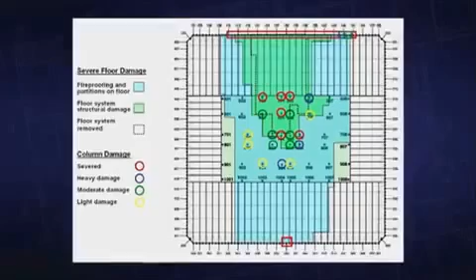September 11th, 2001, a day that changed history. 4 planes went silent and off course. 2 of those planes crashed into the World Trade Center Twin Towers. Several columns were severed, and the jet fuel ignited fires that spread over several floors. About an hour later, millions watched in shock as both towers were suddenly and rapidly destroyed, killing almost 3,000 people, for whom truth and justice may have yet to be served.

Hi, I'm Richard Gage, AIA, licensed architect of over 20 years and member of the American Institute of Architects. I'm founder of Architects and Engineers for 9/11 Truth, a non-profit organization of well over 1,000 technical and building professionals. According to official government reports, the fires weakened the structural steel framing of both twin towers, leading to sudden, progressive, and total collapses.

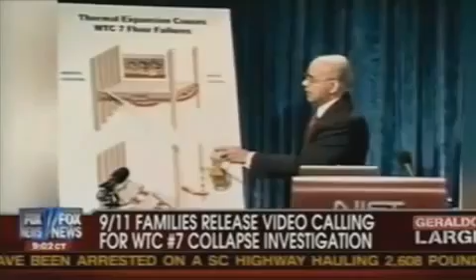Unknown to most people, a third steel frame high-rise, World Trade Center 7, was also destroyed. Critical questions have been raised by more than 1,500 architects and engineers about the official explanations for the destruction of all 3 of these buildings. Along with more than 10,000 other concerned individuals, these professionals, collectively comprising more than 25,000 years of experience, have signed our petition. They're calling for a new investigation into the destruction of these 3 World Trade Center high-rises.

This call is based on evidence that reveals a very different destruction scenario than reported by government engineers. This includes abundant scientific forensic data and eyewitness testimony that was omitted from the official reports. You'll be seeing this evidence and hearing from dozens of these technical experts, including many who are among the top in their respective fields.

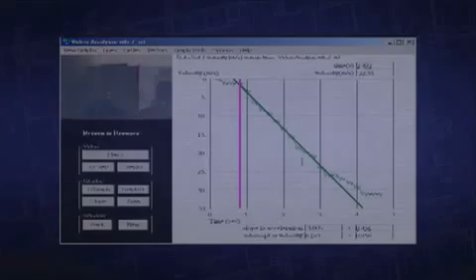Listen to the President provide his account of the pervasive political abuse of science. And we have watched as scientific integrity has been undermined and scientific research politicized in an effort to advance predetermined ideological agendas. As coherent sets of scientific facts are brought into focus by the experts, the data, and the witnesses in this film, you'll come to a much greater understanding of the events of 9/11 and will be in a position to draw your own informed conclusions.

Also, psychologists, therapists, and counselors, along with theologian David Ray Griffin, who have a deep understanding of the personal issues associated with 9/11, will explain why it is so difficult for us to come to terms with the reality of these events, and learn how we can help ourselves and others with this difficult yet vital responsibility.

Of course, the ones still most affected by the events of that tragic day are the family members of the victims lost on 9/11. Several have asked to appear in this documentary. Although our focus will be primarily technical, we are deeply moved and honored to give them the opportunity to speak directly to you.

Now, let's hear from the AE 9/11 Truth professional petition signers, who will share with you what conclusions they came to. Among these experts are high-rise architects and engineers in the fields of structural design, material science, chemistry, fire protection, metallurgy, as well as physicists, explosives experts, and demolition technicians. Joining them will be firefighters and 9/11 victims' family members who support our call for a new World Trade Center investigation.

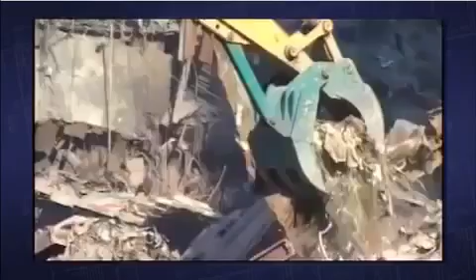Was the structural steel from World Trade Center 7 preserved, documented, analyzed according to standard procedures for investigating engineering failures? It was really clear from the beginning that there was this great move to, as quickly as possible, get rid of all of the rubble and move it off. Because what they did immediately after 9/11 was they started removing the steel, the debris from Tower 7 and all the towers immediately. They sent it off to China to be recycled.

400 truckloads per day of material were taken away from the World Trade Center site and sent to China for recycling. All of a sudden they had a big incentive to recycle steel for some reason. Quickly and rapidly, they were destroying the structural steel. The steel was hauled away and melted down before it could be analyzed.

It was already being carted away and destroyed when the FEMA investigators got there about a month after September 11th. It was being melted down, it was being cut up into pieces so that no real thorough investigation could happen. And that in itself is a crime, and that kind of thing needs to be investigated.

The steel was picked up and carted away before anybody got a good look at it. And the destruction of evidence was a criminal act in itself. It would have answered a lot of questions that we can't answer because we don't have the structural steel to examine.

There were laws violated in the destruction of that evidence. And for the American Society of Civil Engineers to ignore those events is extremely disturbing and is a violation, in my opinion, of their professional code of ethics.

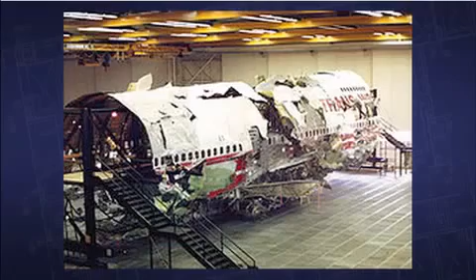Normally, when you have a structural failure, you carefully go through the debris field, looking at each item, photographing every beam as it collapsed and every column where it is in the ground, and you pick them up very carefully and you look at each element. We were unable to do that in the case of Tower 7.

Aside from this one small piece that was found to have intergranular melting, incredibly, none of the other steel from World Trade Center 7 was saved for analysis. This is disconcerting, considering World Trade Center 7 would have been the first steel-framed high-rise building in history to ostensibly collapse due to fire. The government has destroyed much of the evidence, but there's still some evidence available in photographs of the evidence.

My name is Lynn Margulis. I've been doing science every day since I was about 16 years old. I teach at the University of Massachusetts. I have a PhD in genetics. I reconstruct the past, natural history, from clues taken to be representational, and that's exactly what we're doing with reconstructing of why the buildings were destroyed in 9/11. In historical science, that's what must be done.

In 1999, I was a recipient of the National Medal of Science from Clinton, and I received the Da Vinci Award, that is the membership in the Da Vinci Society.

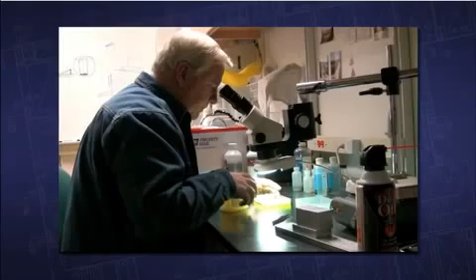Was a proper investigation performed that might have revealed the use of accelerants or explosives in World Trade Center 7's destruction? My name is Steven Jones, a physicist. I received my PhD in physics from Vanderbilt University in 1978, so I've been at this for over 30 years, studying various subjects. I have published over 50 peer-reviewed papers in my career.

NIST concedes that they found no evidence for explosives. So then we asked them, well, did you look? And they said, no, we did not look for explosives or residues of explosives.

I'm Ron Brookman, licensed structural engineer in California, and I received my master's degree in structural engineering from University of California at Davis in 1986. I've been practicing structural engineering ever since then. NIST never did a proper evaluation of the collapse site and the debris.

World Trade Center 7, I would have expected they would have tested for explosives also because of the nature of the collapse and the unprecedented nature of a steel-framed high-rise building collapsing in such a fashion.

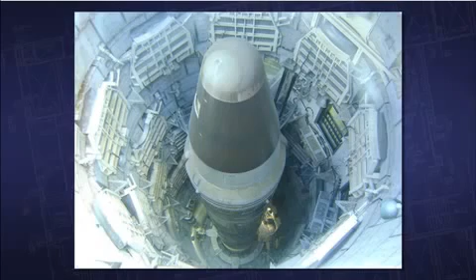My name is Roland Angle. I'm a civil engineer registered in the state of California. I've been practicing in California since 1967. I'm a graduate of the University of California. And my practice has included, among other things, design and testing of structures that were designed to withstand blasts. Specifically, for instance, the launch facilities for the Minuteman missile system.

I was a Green Beret for 6 years during the 60s. I was trained in the use of demolitions, and I blew a lot of things up. One of the things that we did was go out and attack structures, analyze them as to where their weak points were, learn how to place explosives at points that would cause them to fail, and then actually demolish them and analyze our results. So the method of how to attack a structure and cause it to fail with explosives was one of the things that I learned through my military training.

Well, the American Society of Civil Engineers was brought into this investigation early on. They did a very superficial investigation of the site. They issued a report without any significant forensic examination, and there were laws violated in the destruction of that evidence. And for the American Society of Civil Engineers to ignore those events is extremely disturbing, and is a violation, in my opinion, of their professional code of ethics.

I'm Tony Szamboti. I'm a mechanical engineer from the Philadelphia area with over 20 years of experience in the aerospace industry, where I design structures for aircraft and spacecraft and support equipment. Neither NIST or FEMA followed standard protocol for fire and explosion investigations, or just fire investigations for that matter.

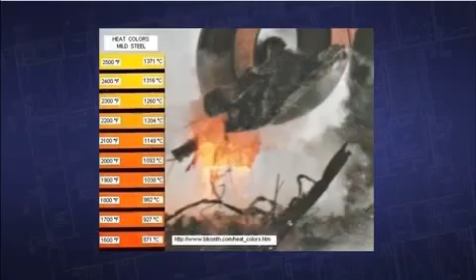Just the fact that there were explosions means they need to be investigated. Terrorists used explosives in '93. We had witnesses to explosions. We have audio recordings of explosions. We have overwhelming evidence that there were some explosive events. The manual gets into thermite, and it says if you have melted steel or concrete, which we had on 9/11, and there's videos of it, people can see it. We should test for it. It says when you have melted steel or concrete, you test for thermite.

So the fact that they're not testing for it is crazy. We had 3,000 Americans murdered, and we had the first three high-rise steel collapses. We have all these reports of explosions. We have the vans pulled over. We have the history of terrorists using explosives. It's absolutely ridiculous that there's no excuse for it. It's criminal, in my opinion. It's absolutely criminal that they refuse to follow the national standards, and the national standards say that they should be testing for explosives.

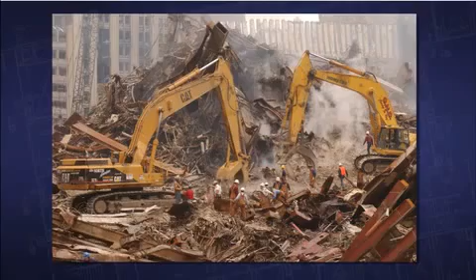One of the other big issues we have, the firefighters that are members of Firefighters for 9/11 Truth, is just the blatant destruction of evidence. We're not talking about a little bit of evidence. They destroyed all the steel, basically the bones of the building that would have told us how this first high-rise steel structure in history that hadn't been struck by an airplane, all it had was a few fires on several floors, and it had only been burning for a few hours. We've had other high-rises burn much longer. This was the way we could have learned from this, was analyzing that, looking at the steel and seeing how this collapsed and how it failed and which steel members did what.

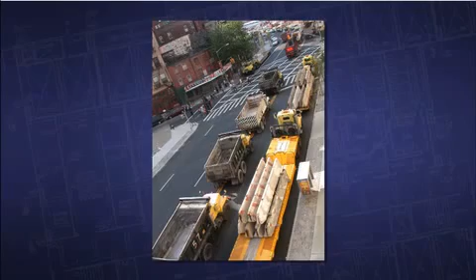Well, we can't do that, because what they did immediately after 9/11 was they started removing the steel, the debris from Tower 7 and all the towers immediately. Why were they destroying this? They sent it off to China to be recycled. So they never had any physical evidence to do the investigation. The national standards are very clear. We have preservation of evidence, we have spoliation of evidence, there's all kinds of basically standards that you don't destroy evidence.

So that's what we're calling for. We're calling for an investigation into the investigators, why they destroyed this. We're calling for a reinvestigation that follows national standards. And the big thing is everybody says this is in the past, leave it in the past, and that's not true. We have ground zero workers dying today. They're getting cancers, and several of them don't have medical insurance. The FDNY, most of them are being taken care of by the department, but there were so many thousands of volunteers and members of other departments that showed up, and they were there for months afterwards, and they don't have the medical coverage. They can't make their house payments.

They're sick and dying, and we as a country are ignoring them. We promised we'd never forget, but it looks to me like most people have forgotten, and they want us to forget, and that's what we're here for, is to basically just ask people to take another look into this, show some compassion, and let's help our brothers and sisters out and really reinvestigate 9/11. It's changed our world. Not to mention that there were 343 brothers murdered, but we're at war over this. We've lost a lot of our freedoms over this, and we don't have the real story on what happened because there wasn't a proper investigation done.

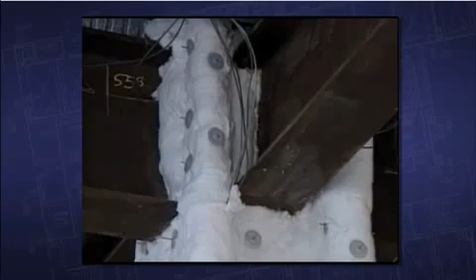The way in which steel-framed buildings behave in fires depends on their construction. In this test, done by British Steel in 1995, a large amount of typical office furniture was burned to see what would happen to the heavy steel beams that supported the ceiling. When steel is bare, when it heats up, it gets weaker. It's not that it melts in a fire. In fact, normal fires are not hot enough to melt steel. Even if you were to use an unusual fuel like kerosene, you cannot achieve temperatures hot enough to melt steel. What happens is it starts to lose its strength, and as it loses its strength, it starts to sag. It becomes softer and sags and can no longer support the load.

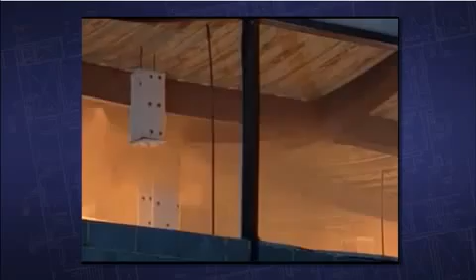This was the largest test of its kind ever conducted. It showed how unprotected steel can be distorted, even by a normal office fire. But as is typical in steel buildings, the structural beams only slowly and progressively warped and sagged. There was no chance of a sudden collapse.

In over 20 years, I have not seen, until recently, a protected steel structure that has collapsed in a fire. The World Trade Center 7 building reminds me of the Meridian Bank building in some ways in Philadelphia. The Meridian Bank building is a 38-story skyscraper that burned for 18 hours in 1991, suffered extensive damage from the fire, but did not collapse.

I am Dan Barnum, FAIA, a graduate architect from Rice University with a Bachelor of Architecture degree. For the 40-plus years that I've been practicing architecture, I have designed a variety of buildings from small houses to high-rise office buildings. Some of the high-rises that I've worked on are One Shell and Two Shell here in Houston, and I was project manager for a 22-story office building in Akron, Ohio. I'm a fellow of the American Institute of Architects. I've designed high-rise buildings, and I know what they do in fires because I've studied that.

Later in the day, when World Trade Center 7 collapsed, they had already shown us pictures of a few fires in that building, and they weren't even raging. How could that cause a building to collapse as if it were imploded? Couldn't happen.

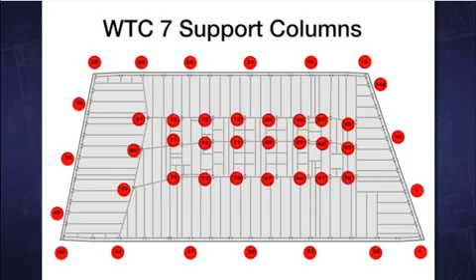My name is Jonathan Smolens, PE. I'm a professional structural engineer in the Boulder, Denver area for the past 12 years, and one of my specialties is forensic engineering, including evaluation of structures post-disaster. What happened to those columns to all collapse at the same time? The explanation provided does not match the evidence that we have.

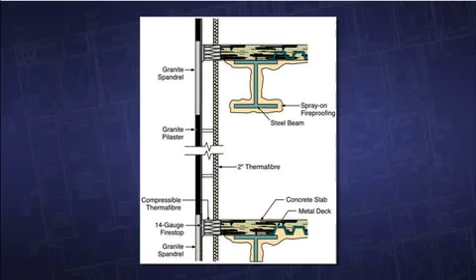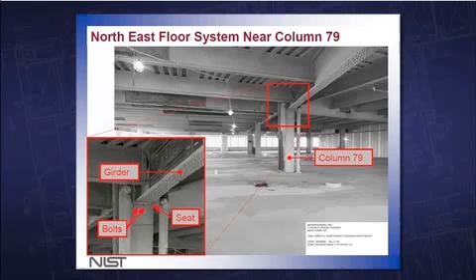My name is Michael Donly, PE. I'm a structural engineer with 14 years of experience. I get involved mostly with the design of steel-framed fireproof buildings. We've never had a steel-framed skyscraper collapse in the United States or internationally, so there's no precedent. I don't think Building 7 could have collapsed by fire, as NIST tells us, with this collapse mechanism starting with thermal expansion that worked its way upward and outward through the building in a matter of seconds. There's not enough time for the building to collapse the way that NIST tells us it collapsed.

I'm Ed Munyak, licensed fire protection engineer for at least 25 years, and I work for a number of organizations, city, federal, large insurance companies, as a consultant, always in the area of fire safety, and with the goal of keeping the public safe and first responders safe.

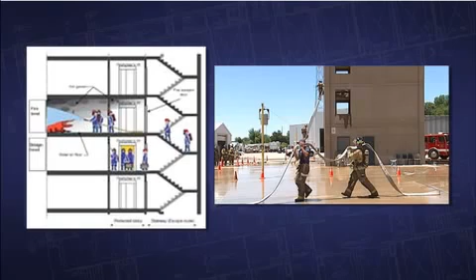I became fascinated with the government's version of the events on 9/11, because this was totally contrary to everything that I've ever experienced, either working in the field of fire safety or knowing what I know about mechanical engineering. It defies many fundamentals of mechanics and materials and physics, and just many fundamental engineering concepts.

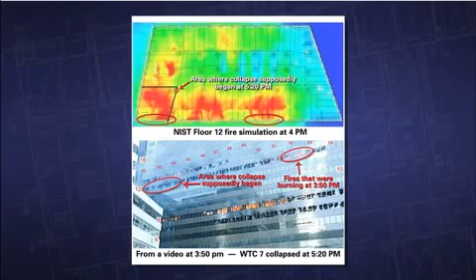World Trade Center 7 - NIST claims the fires were very large, very hot, and long-lasting, when in reality, observation, which has been researched by many people, shows these fires did not last very long. They were not in the locations where NIST claims they were at given times.

According to lead investigator Shyam Sunder of the National Institute for Standards and Technology, NIST, World Trade Center 7 collapsed at freefall acceleration for more than 100 feet of its fall. What does the speed of the collapse reveal to us? Essentially, in less than 7 seconds, Tower 7 came down upon itself.

Building 7 - NIST reports admit it fell at the rate of gravity for the first 100 feet. Well, that's impossible unless there's nothing resisting it. It's just like taking your car keys out and just dropping them. That's how fast the building came down, for over 100 feet. And the only way you can get that is when there's zero resistance.

So what we're looking at is a building just coming straight down, falling right through itself with zero resistance. Buildings don't have zero resistance, which is why you feel comfortable walking into a building. A building cannot do free fall with a huge steel structural system in place to support it without it being blown up. That's the only way it could come down at free fall.

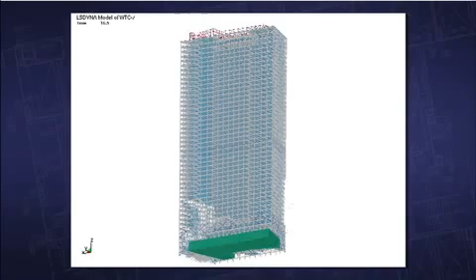The connections failed first without any of the members exhibiting large deformations or deflections. Over 400 connections per second had to fail in order for the members to be released and for the structure to descend at almost free fall rate, failing at that rate progressively across the building. Even if a floor were to collapse, it still wouldn't be able to collapse all of the connections simultaneously at the rate that it did without secondary explosions. There's no hesitation - there was no hesitation when it was to hit story after story.

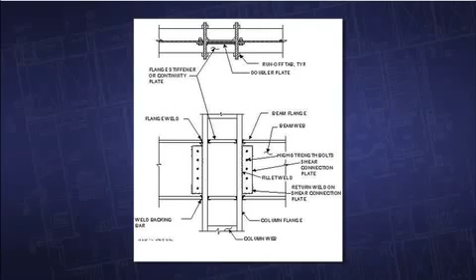If you were to look at a standard moment frame steel connection, which is a welded connection between the beam and the column, it would take on the order of around 500,000 pounds to shear off one connection. If you multiply that by 400, put maybe a safety factor of 4, you would require 800 million pounds of force per second in order to collapse the building the way it was shown based on the NIST report and what we saw on the video evidence of the building that day.

It's highly unlikely. I don't know how that could ever happen without secondary explosions. It's not logical or reasonable. The fact that it's coming down at free fall says all of the energy is being used to just make it go straight down, which means it's coming down through itself and not breaking up the building as it goes. Something else has to be clearing the way. And that is smoking gun evidence to me. I think that's one of the primary pieces of evidence that these buildings really were demolished. They weren't just accidents that happened.

We might anticipate that an unevenly damaged building would fall over. Yet videos of the collapse of Building 7 show a fairly symmetrical fall. How do we make sense of this? The exterior of the building comes down fully, symmetrically, and at one time. Both sides of the building come down completely. This is fully indicative of full structural support being removed for at least 8 stories.

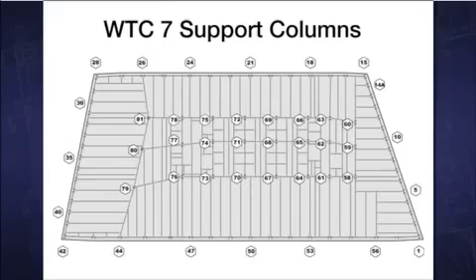For it to come down straight down upon itself, you would need to basically take out the supports at the center, at the core. The exterior columns on the outside as well as on the inside at the bottom would have to be severed almost at the same time. Well, that's another indicator that this report is very suspect, because I would have expected in a classic implosion, as I've seen numerous times, is the core to fail.

My name's Tom Sullivan. I worked for Controlled Demolition Incorporated, CDI, the top-rated explosives demolition firm in the world. As an explosives loader, my job was to place explosives in the buildings to prepare them for demolition. I was licensed while in New York by the New York Fire Department to handle explosives. And I worked on major projects such as Seattle Kingdome, the Three Rivers Stadium, Philadelphia Naval Hospital, and the KeySpan gas holders in New York.

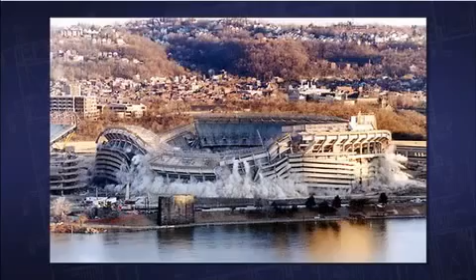I would expect the center of the building to start moving first, and then as the implosion progresses, the sides come in, then the rest of the building is involved. What I saw, it was a classic implosion. The center of the core, the penthouse area, starts to move first, and then the building follows along with it. And there were so many columns in the building that were not affected by either the fires or the impact damage, and they all came down just at once.

So it's a little disheartening, and it's implausible. When it's all finished, the outside walls from the lower floors are piled one on top of the other right in the middle of the building. Just like a house of cards if it were coming down.

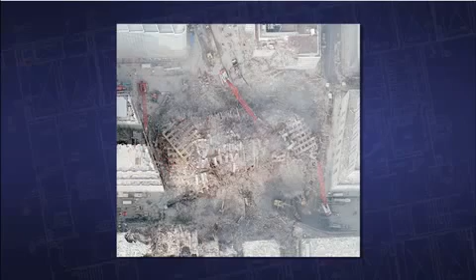Logic tells you that if you have a single failure at some random point in the building, that the entire building is not going to collapse. The collapse would have been a chaotic, random event. The building would have partially collapsed, possibly, but it didn't. There was a total collapse, and there's very few things that could explain that, none of which are addressed by the NIST report.

According to NIST, the failure occurred at column 79 on level 12. This means basically they're talking about a single columnar collapse or failure that resulted in a total collapse of the building. That just does not make any sense. As a structural engineer, I don't believe that the failure of one column would normally bring down an entire building in the way we saw World Trade Center 7 come down, because of redundancy, because of all the other columns in the building that were not affected.

NIST provided computer animations in support of their fire collapse theory. But what do independent engineers say about these animations?

When you observe the footage of how the building failed, and when you look at the animation of the failure, and compare that to what you actually observe in reality, I think they disprove their own theories. It is impossible for it to fail the way they said.

I've seen the animation sequence from the National Institute of Standards and Technology for their mathematical model of the collapse of Building 7. They have the inside members, where one column gave way, which they claim resulted in the collapse of all the surrounding members, and then this precipitated a global collapse.

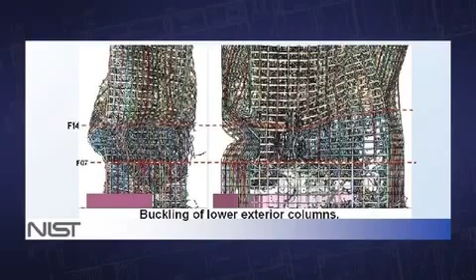The exterior of the NIST World Trade Center 7 computer simulation model, which they put together to try to explain their theory, shows very large deformations which are not observed in the video of the actual event. Yet they don't attempt to explain this in the report, or why their model doesn't represent or replicate reality.

What's actually happening with the NIST computer model is that it's behaving like a natural collapse would. It would be deforming the exterior of the building if the whole interior was collapsing prior to the exterior. What we're seeing is what would happen in a natural collapse, and what we see on the real video is not a natural collapse. So I think that the NIST model is flawed.

Of course, they won't release all of the parameters they used to model the collapse, and that is a primary problem for them. NIST has also repeatedly refused to release computer input data that was requested through the Freedom of Information Act concerning World Trade Center 1, 2, and 7.

What do these professionals conclude about the destruction of World Trade Center Building 7?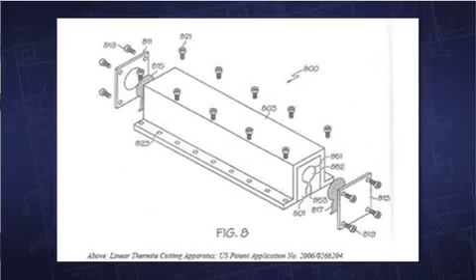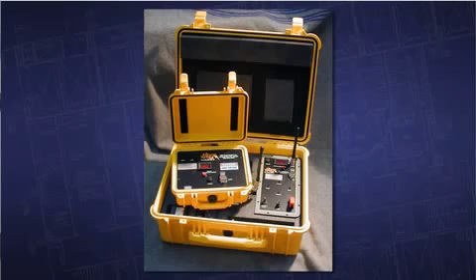There had to be some agent that was destroying the connections in Building 7 at 400 connections per second, and the only thing that I can see that would be capable of doing this would be explosive devices at the connections. This is why I think there has to be a new investigation to find out the real physical causes for all these members to act in an atypical fashion.

I certainly believe that it had to have been controlled demolition, controlled charges, explosives, something of that type, because it was a sudden failure.

Controlled demolition. There's no way that fire did what they said it did to that building. Impossible. Couldn't happen. It just did not make sense that a building that had a few minor fires in it could possibly succumb the way it did.

If there was damage, it would have been minor. There might have been some deflection of a beam or two here or there, but not a total and unequivocal complete collapse. It just doesn't ring true.

A few fires in that building, and they weren't even raging. How could that cause a building to collapse as if it were imploded? Couldn't happen. To me, it was obvious that there was some controlled demolition and some explosions involved.

When I saw Building 7 fall, it appeared to me to be controlled demolition because it fell in free fall manner into itself. It is my opinion, as a former 12 Bravo combat engineer well trained in the use of explosives, that this building, all three buildings, were brought down as a result of controlled demolitions.

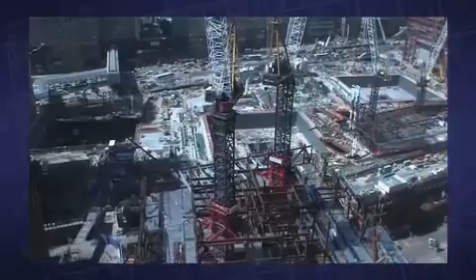This is the original site of the World Trade Center Twin Towers. Construction is now underway where dramatic new facilities are being erected.

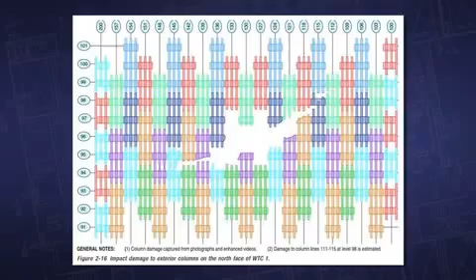Just 10 years ago, the planes hit the towers, cutting through some exterior and interior supporting structural steel columns. The fuel from the planes ignited office fires across several floors. According to the official reports, the structural steel frame was weakened and failed, causing a total progressive collapse of each tower.

Does the official explanation make sense? Was there a comprehensive investigation that examined all of the evidence? Let's look at the details.

These buildings were designed to take multiple impacts from airliners. I walked into the office and the first words that I heard was, 'A plane's just run into the World Trade Center.'

And my initial thought was, well, that's okay. It's built to withstand a 707. He stated that the fuel would be dumped into the building, but the building would still be there, although most of the fuel blew out the opposite side of the building.

These buildings are built to handle several times the load above them. Those perimeter columns could handle 5 times the load above them, and the core columns could handle 3 times the load above them. The majority of the jet fuel was burnt up instantly in the big fireball, and it was gone. The fires that were left were office furnishings and carpet and things like that.

A lot of things in these kind of buildings have to be fire resistant by nature. It's required by code. So there really isn't a whole lot of fuel in there to begin with. The media portrayed these fires as being extremely hot, but the fires were not that hot in World Trade Center 1 and 2. If you look at the NIST's own data, you could see this.

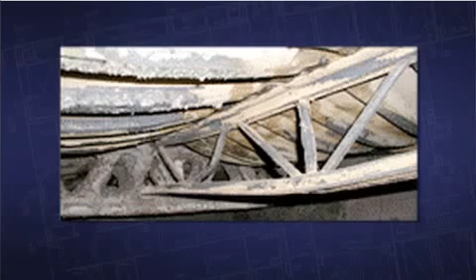The NIST testing of the Twin Tower floor assemblies was done at Underwriters Laboratories. This was done per ASTM E119 in a 2-hour, 2,000-degree fire test. During the test, the main trusses sagged approximately 4 inches after 60 minutes and 6 inches after 100 minutes. Yet NIST had the main trusses sagging well over 40 inches in their models.

Rather than a slow groaning collapse that we might anticipate, the Twin Towers show in the videos a very rapid, sudden onset of destruction. What does this imply?

I'm Frank Cullinan, a practicing civil engineer in the state of California. I have a Bachelor of Science from Chico State, which I received in 1988. I've been a licensed civil engineer since 1993. I specialize in bridge construction, retaining wall construction, small building construction, bridge demolition, and I have experience in bridge design and building design.

Structural steel is required by building and design codes to prevent catastrophic failure and loss of public life. Everybody's seen the building collapses on 9/11, and it was shocking how fast the buildings collapsed. The way the buildings fell was not indicative of the way a building that's in distress collapses. This doesn't happen with structural steel buildings and never has and never will again.

We assume that fires could destroy a building. Why people select steel buildings is because they would destroy slowly. It would gradually twist and bend and give people plenty of time and safety in getting out of the building. The basic philosophy of the building codes in the last 75 to 80 years has been to ensure ductile failure of the members to provide for the public safety.

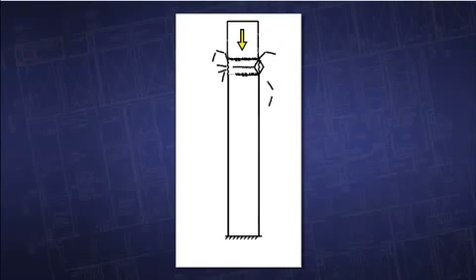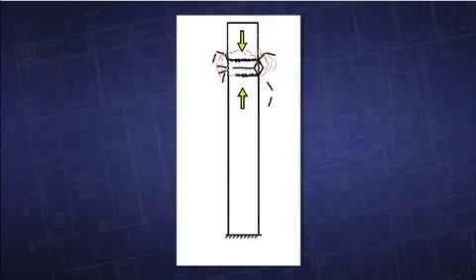You're looking for a jolt, that if this thing actually comes down and hits, you should be able to see the point at which they actually impact, because it would actually slow down the motion of the falling block. And you can see it in the graph. It is not there in the case of the North Tower. It never slows down. It accelerates the entire time. And that was what was extremely significant. So I published a paper about that. It's in the Journal of 9/11 Studies.

And so if you had the top section acting like a pile driver, if in fact it actually hit and made an impact, it was effectively crushing anything, pushing hard on this core structure below it, the core structure is going to push back equally hard. And that's what's going to cause the top section of the building to slow down. But the fact that it's constantly accelerating downward is evidence that it didn't slow down. It's not actually hitting and engaging with the structure below it in any way that could demolish it. The top section is not crushing the bottom section of the building, or it would meet resistance.

I am Richard Humenn. I am a retired professional electrical engineer. I went to Brooklyn Polytechnic Institute and received the Bachelor of Electrical Engineering degree in 1954. I worked for Joseph Loring for 41 years and was Principal Chief Electrical Engineer for the World Trade Center complex.

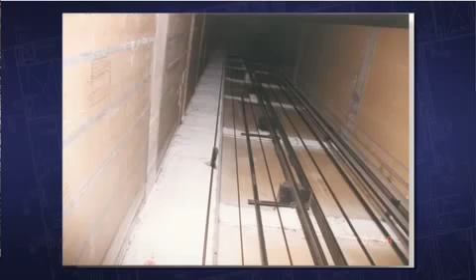I was very familiar with the Twin Towers elevator systems because we took over contractual maintenance and improvements of the elevator systems after the project was completed. I actually ran and rode up and down elevator shafts on the top of a car going 1,200 feet a minute. You could imagine the experience.

I'm very familiar with the interior structure that surrounded the elevator shafts and the accessibility which the elevator companies had 24/7. The only way that I can see that the towers could have collapsed is that the interior columns were compromised.

In Tower 1, unless my eyes were deceiving me, before the tower started collapsing from the top, the antenna started to fall. And the antenna, of course, was over the middle of the elevator shafts. And, of course, their access to the elevator shafts gave them total access to the surrounding core columns, the interior of the core columns.

NIST, the National Institute of Standards and Technology, acknowledges that the towers came down at essentially free-fall acceleration. What are the implications of that admission? The measurements have indicated that Tower 1 collapsed in about 11 seconds and Tower 2 collapsed in about 9 seconds. And the argument goes that this is essentially the rate at which free fall would happen.

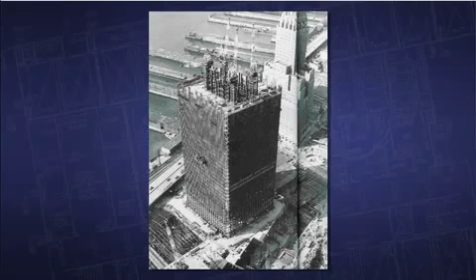I had a friend that asked me if it was possible for the Twin Towers to achieve near free fall speed when they collapsed. The Twin Towers could not have come straight down through the thousands of tons of structural steel, through the greatest resistance, the resistance of 80,000 tons of structural steel, at the speed of practically free fall. That just would not happen.

There are columns of steel around the exterior of the building and within the core, all of which are there to prevent the thing from falling down. And so even if something falls on it, it's not going to immediately just go pop, pop, pop, pop, pop, pop like that, floor by floor. If it's going to collapse, it's going to have to take some time to weaken the structure below it.

This structure was capable of holding 3 to 5 times the weight. And here it is falling through it with a resistance of only 1/3 of its weight. Roughly 90% of the resistance has been removed.

And what's happening is the top section is not crushing down the lower section like a pile driver, which is the picture that NIST basically is painting. It's actually falling into material that's already been pulverized, that's offering very little resistance. It's just coming down through pre-pulverized material.

One of the fundamental laws of nature is the conservation of energy. There was no time for this elastic deformation and plastic deformation, which would have absorbed energy and decreased the descent to less than free fall speed. As energy is drained away from the system to deform those members, it would slow down the descending mass and cause a descent at less than free fall speed.

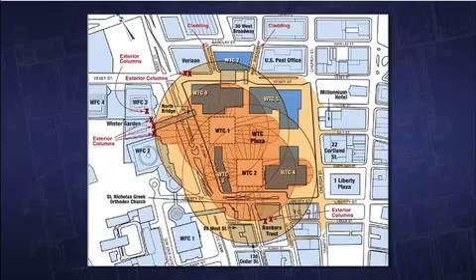The spread of debris in a large radius around each tower—what we see is an outward explosion of material beyond the perimeters of each footprint. And this is not expected, and it's not congruent with the reports of our government.

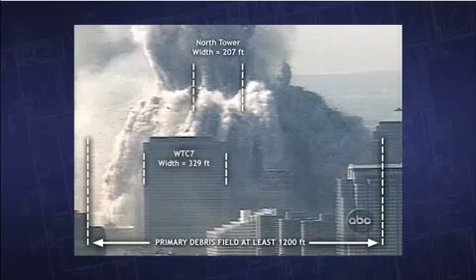Debris was shooting out for hundreds of feet in all directions at 70 miles an hour, leaving the 80th floor of the North Tower and making a fairly level trajectory. That to me is fairly alarming. Large multi-ton beams were hurled hundreds of yards laterally. Gravity works vertically, not laterally. The number I got was 78 miles an hour. So something's happening to throw these things horizontally at those kinds of speeds.

And here it is trailing white smoke the whole time. It really is indicative of some kind of explosion. The individual explosions that I noticed 20 and 30 and 40 stories below the collapsing structure, those are what demolitions guys call squibs. And that's another characteristic that seems to be evident.

Well, in the case of the South Tower, you can see these jets of black smoke being ejected from many locations on many different floors above the level of the impact. There's a whole bunch of these squibs or puffs coming out the side of the building. Naysayers tend to say that's just air being blown out the windows because you have an accordion effect, it's being compressed. Well, it's going on at a lot of different levels at the same time is one thing. And if you're compressing it out here, if you're blowing out the windows down here, how are you getting the air pressure? It doesn't really work to say it's just air pressure.

I estimated these are coming out faster than 100 miles an hour. The impact of the floors pancaking upon themselves would create gushes of air out the side, but not the kind of explosive force that we saw that would throw I-beams across the street into the windows of other buildings. The ejection of materials out of the building, the manner in which it fell, the speed at which it fell, exhibited all the signs of demolitions and the completeness of the destruction down to their individual elements.

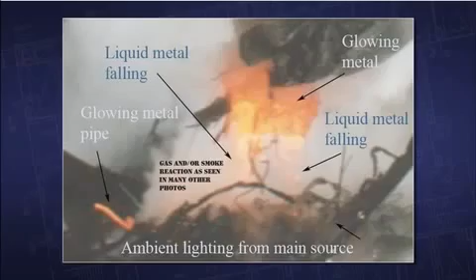In an office fire, you cannot generate enough heat to melt steel. And yet we have evidence of molten iron in the microspheres, in the rubble pile, and the metal pouring out of the side of the tower. We could have filled up the Twin Towers with jet fuel and burned it all up, and that does not cause a fire hot enough to melt structural steel.

My name is Gary Warner. I'm a mechanical engineer. I hold a professional certification from the Association of British Columbia. I worked in the project engineering department of the casting plant of Alcan, the aluminum company of Canada, one of the largest aluminum smelters on the planet at the time.

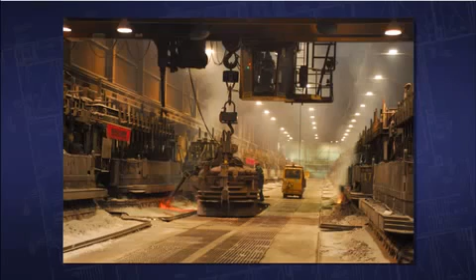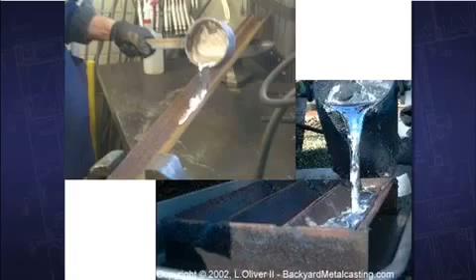And in that smelter, we turned aluminum oxide into aluminum, molten aluminum. Molten aluminum is silver. It's not yellow, it's silver. It looks like mercury. The yellow molten metal that I saw pouring out of the South Tower is indicative of molten iron.

I was a bit incredulous when I learned that NIST claimed that the molten metal was aluminum. It doesn't look at all like molten aluminum. It looks like iron, molten iron. That's what it looks like.

And I've seen tons of it. We used to cast this at Alcan. They still cast it. I spent 2 years casting that.

I'm David Gregg. I have a master's and PhD in chemical engineering from the University of Illinois. Afterwards, I went to work for Lawrence Livermore Laboratory, where I worked for more than 30 years.

You cannot get a flame hot enough to start the metal to molten, make it molten in the first place, so that this other process takes off. I don't know of any mechanism for that.

The only way that's known that a carbonaceous material can cause steel or iron oxide to turn into a molten metal is in a blast furnace. Yeah, and that's very different than what we had.

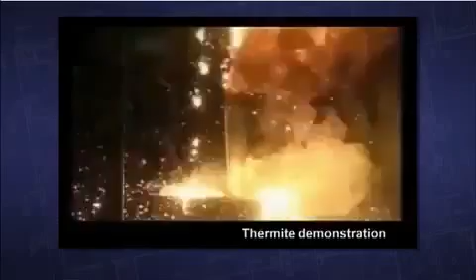An incendiary used by the military, thermite is a compound of iron oxide and aluminum, which when ignited sustains an extreme heat reaction, creating molten iron. In just 2 seconds, thermite can reach temperatures over 4,500 degrees Fahrenheit, quite enough to liquefy steel.

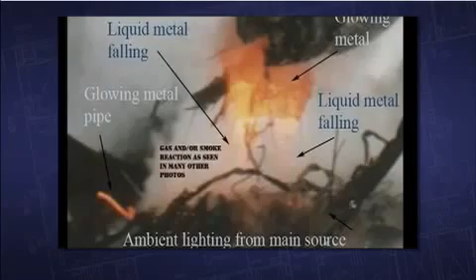We know that open-air fires cannot burn hot enough to melt steel, but metal had melted at the base of the towers. The next question is how do you get the sulfur in these pieces of steel or in the debris, and that question is unanswered.

There's a version of thermite called thermate, which has sulfur in the thermate, and what the sulfur does is it's sort of like salt on ice.

Appendix C of the FEMA report describes sulfur residues on the World Trade Center steel. The New York Times called this the deepest mystery of all. Sulfur significantly lowers the melting point of iron, and iron oxide and iron sulfide.

It basically makes the steel melt at a lower temperature. So instead of having to bring the steel up to 1500 centigrade, you can slice through it with material that's at 900 or 1000 degrees centigrade.

If you do a search on Google for thermite and building demolition, you can find all sorts of wonderful devices that have been fabricated and invented that use thermite for building demolitions. Thermite, the old-fashioned thermite, is a mixture of pulverized aluminum and pulverized rust. If you can get this mixture to react, which is not so easy, it produces tremendous heat, and this is what you call an incendiary.

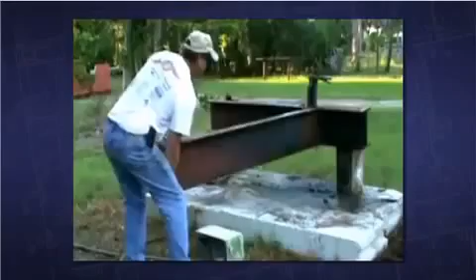The old-fashioned incendiary is not an explosive, but it is still used for military purposes for melting iron structures. Practical applications of thermite involve things such as equipment decommissioning in the military. When they have a piece of artillery or a tank or something like that that they don't want to leave behind to the enemy, they throw what are called thermite grenades down the barrel, let's say.

But thermite does not explode. It simply reacts, produces large amounts of heat and molten material. In the case of thermite cutting charges, you would have heard far less noise since they are worked by thermal heating, melting of the steel, rather than an explosive cutting as in RDX charges.

I'm Kim Ireland. I have a degree in chemical engineering from Clarkson University in 1963. After graduating, I served two years as a reserve officer in the U.S. Army Corps of Engineers, where, among other things, I had training in explosives such as C4. I was involved in the industrial chemical industry for 20 years with major companies.

There were reports of molten steel having been seen in the rubble pile of all three buildings, and I knew that jet fuel, which is essentially kerosene, is not capable of melting steel nor iron. Kerosene or jet fuel burns at less than 1600 degrees Fahrenheit, and molten steel needs at least 2700 degrees Fahrenheit in order to melt.

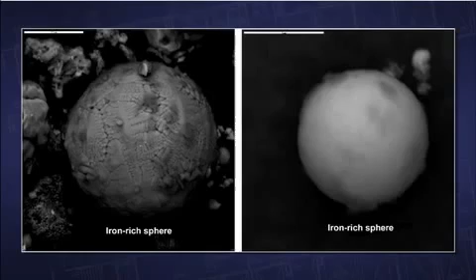When the USGS collected samples of the World Trade Center dust, they found the iron microspheres. So far, the USGS does not have a valid explanation for the presence of these iron microspheres. But I've independently seen thermitic activity within two separate independent samples of World Trade Center dust.

I'm Jerry Lobdell. I'm a retired physicist and chemical engineer. I have a BS in chemical engineering from Texas Tech, and I have extensive coursework in mathematics and physics from the University of Texas at Austin. I've had broad experience in analysis and applied research, a 30-year professional history spanning physics, chemical engineering, statistical analysis and modeling, and operations research.

So what do the microspheres contain? Iron is the main element, and then it has smaller portions of aluminum, sulfur, a trace of manganese, a trace of potassium. Most of them are less than about a tenth of a millimeter in diameter, and they're spherical, and they're found in all of the dust blown out of the buildings during collapse, no matter where in Manhattan that dust is picked up.

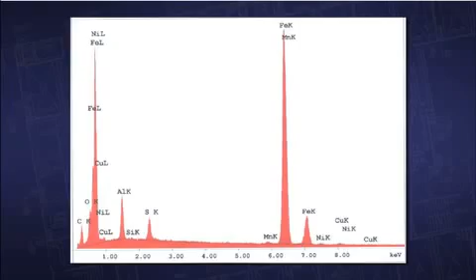You must have had a much hotter heat source for you to get 2700 degrees Fahrenheit in order to melt the steel, melt the iron, to get these spheres, these molten spheres. Your heat source must be something like an exothermic chemical reaction that reacts, in the case of thermite, at 4500 degrees Fahrenheit.

My contention, based on finding thermite residue in the dust, is that it happened before. It didn't happen after in the fires that ensued in the rubble pile afterwards. It's all the characteristics of the microspheres, along with what I see in the attack of the beams that were actually found, that tell me thermite was involved in melting those steel beams.

Out of the ashes of the World Trade Center devastation rises the Freedom Tower, whose foundation, however, is shrouded in question. For example, in the World Trade Center dust, an international team of scientists found an advanced form of highly energetic nanothermite composites. What is it, and where does it come from?

My name is Niels Harrit. I have a master's and a PhD in chemistry, and I'm associate professor at the University of Copenhagen, and I have been so for almost 40 years. I have published close to 60 peer-reviewed papers in the best journals, and currently I'm involved with research on X-ray time-resolved spectroscopy on time scales of a millionth of a millionth of a second.

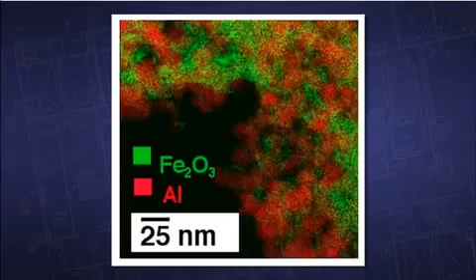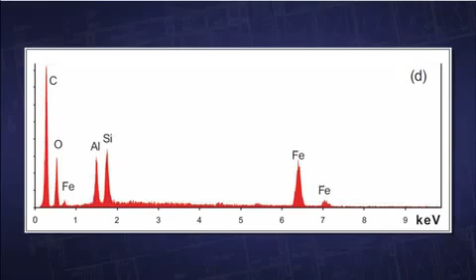The primary elements in the red material are aluminum, iron oxide, as well as silicon and carbon. The iron oxide appears in faceted grains, approximately 100 nanometers across. The aluminum appears in thin platelets, about 40 nanometers thick. It is the small size of the particles involved in this material that allow us to characterize it as nanothermite.

In ordinary thermite, the particle size is much larger, and hence ordinary thermite is an incendiary. Whereas as the particle size becomes smaller and smaller, it can become explosive — super-thermite, it's sometimes called.

This red material also contains a significant amount of carbon, and the formulation of nanothermite as described by National Laboratory publications also implies the presence of carbon. Very typically, the organic component is used with nanothermite in order to produce gas — a very high pressure gas that makes the nanothermite an explosive.

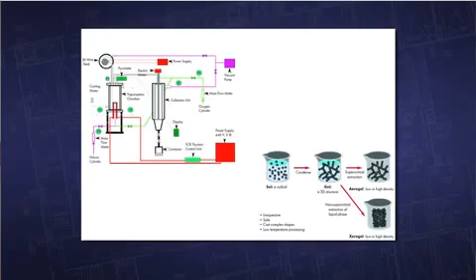We do have descriptions from Livermore National Laboratory in particular of how they fabricated this material, but to fabricate it is not so easy. This is discussed in our paper in the Open Chemical Physics Journal, published in April 2009. So far, none of these papers have been refuted in the scientific literature, which means they are unchallenged in the scientific sense. They stand as an indictment, really, of the official story of 9/11.

One of the things I'd like to stress about these chips is that they really shouldn't be there. They're not a naturally formed agglomeration of aluminum from the aircraft or materials in the building and iron oxide that got knocked off. It isn't just a haphazard bringing together of iron oxide and aluminum, which are the basic components of thermite. This is a material made up of nano-sized particles that are all very uniform, very symmetrical.

The formulation of the red chips is nano-sized. This cannot be paint — paint does not have these exotic properties. It's impossible. We do not know which role is played by the red-gray chips that we found in the dust.

But we know, and this was already totally clear before we started investigating the dust, that both explosives and incendiaries were used in the controlled demolition of the World Trade Center. This is quite obvious because of other observations — the molten iron and other findings in the dust. This is material of military use that really shouldn't be there.